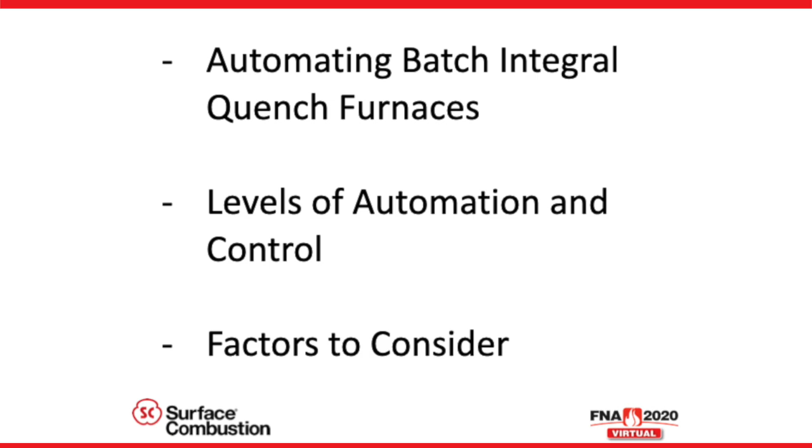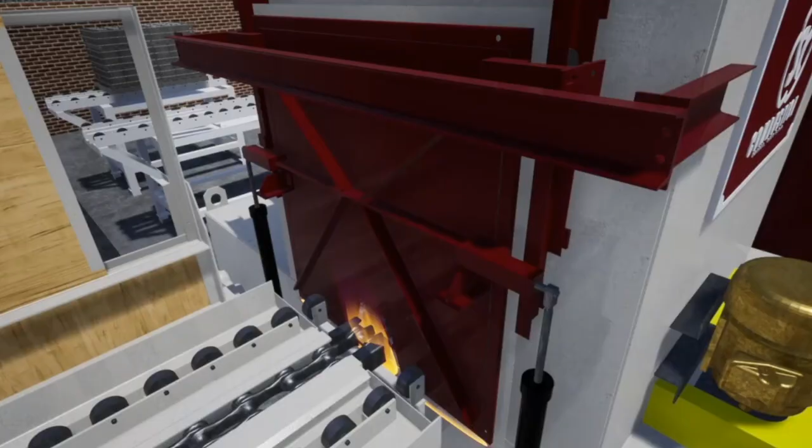The first step in describing an automated line is defining the movements and process of automation. We will first focus on the mechanical movements within the batch integral quench furnace. Although most furnaces manufactured today include internal handling systems, older furnaces and some still manufactured today use charge car handlers to transfer loads from the furnace chamber to the quench elevator.

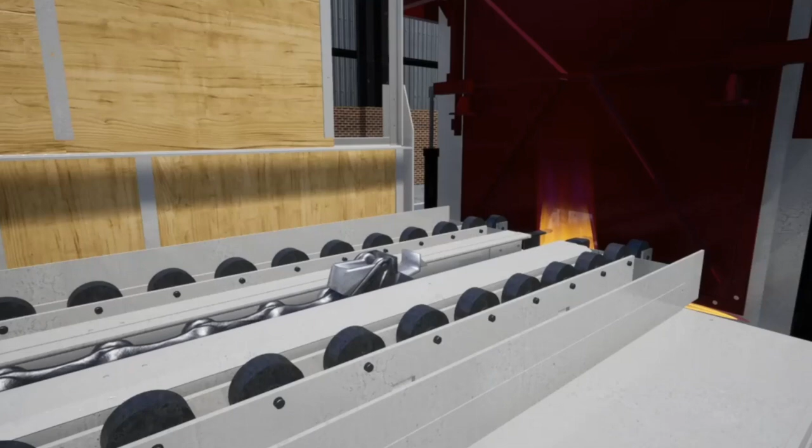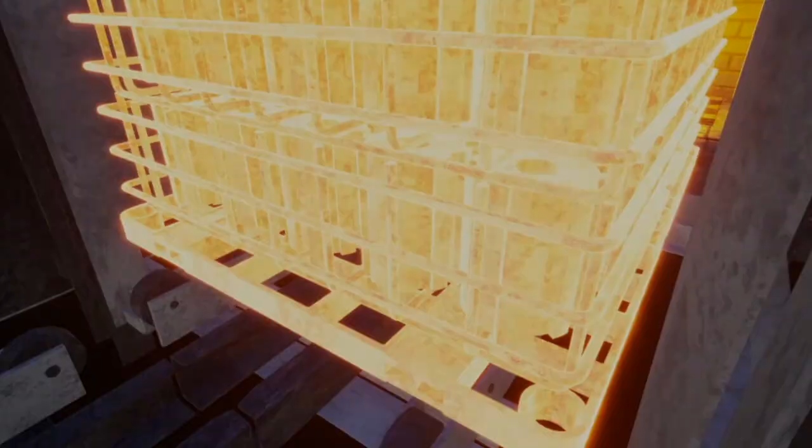All motions were controlled by operator push buttons. This included opening the vestibule and furnace door manually and charging the load with the charge car handling system manually. Load quenching was also performed manually with the charge car handler. This could result in varying furnace-to-quench times depending on the speed of the furnace operator pressing buttons and actuating handles. The result was a slow, non-repeatable quench time and inconsistent material properties.

The inclusion of the rear handling system allowed the internal motions to become part of the programmed cycle. This was a progressive step in the automation development. The furnace operator's only responsibility was to place the load into the vestibule and start the cycle.

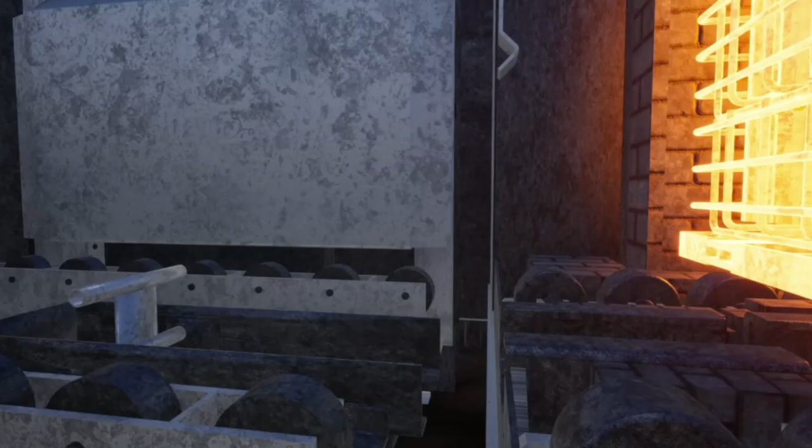Relays and timers would actuate the door and rear handler to transfer the load into the furnace, back into the vestibule, and down into the oil quench. The programmed movement provided for repeatable furnace-to-quench times, improving part quality and consistency.

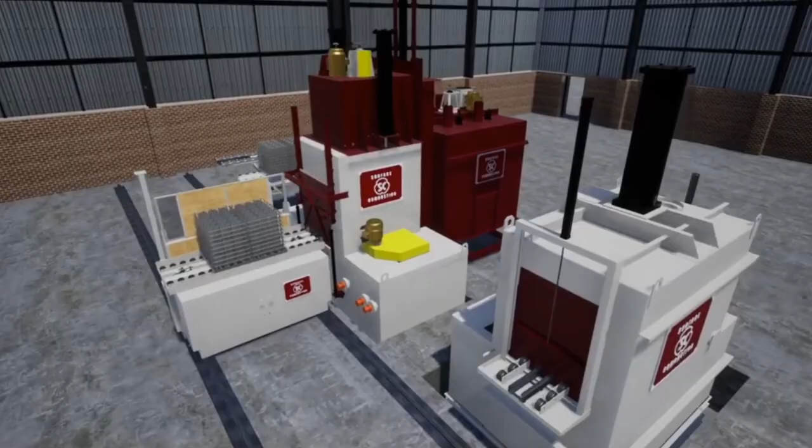Further advancement in controls replaced the timers and relays with PLC hardware and software. This presentation will focus on the next level of automation, which includes an unmanned charge car delivering loads between the heat treat equipment components, including BIQs, temper furnaces, washers, tables, and other components.

The programmed automation includes setting a path for the load to be processed from beginning to end. The plan would also include recipes for each step in the path. This may include pre-washing, preheat, carburizing or hardening, post-wash, and tempering. Once the path and plan are in place, the smart charge car will deliver the workload from step to step without the need of human interaction.

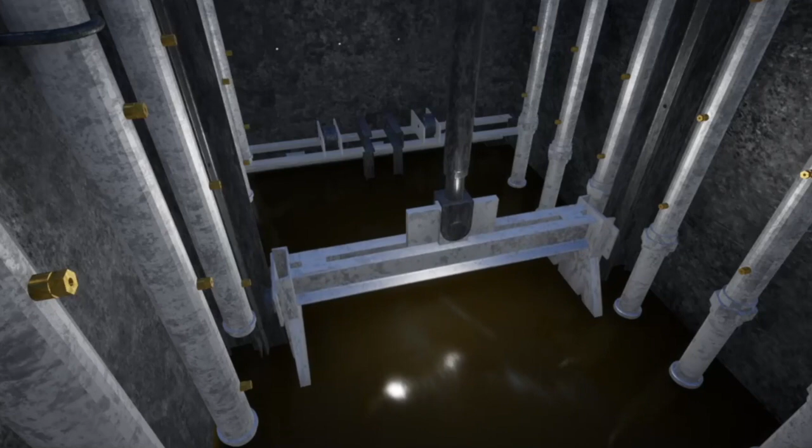Implementing an automation system will affect your business in many positive forms, including reducing the risk of accidents, improving quality control, increasing production, and optimization of manpower.

Discussing automation should also include some initial discussion of controls and the layers in the automation pyramid. A typical automation pyramid for industrial applications includes a field level, a control level, a supervisory level, a planning level, and a management level. On the field level, we find devices connected directly to the processing equipment.

The field level includes sensors, actuators, valves, and any other device used for controlling the equipment or collecting data from the process. Thinking back to the handling systems, the furnaces built 60 to 70 years ago operated on the field level only. There were no programs and no second level of automation.

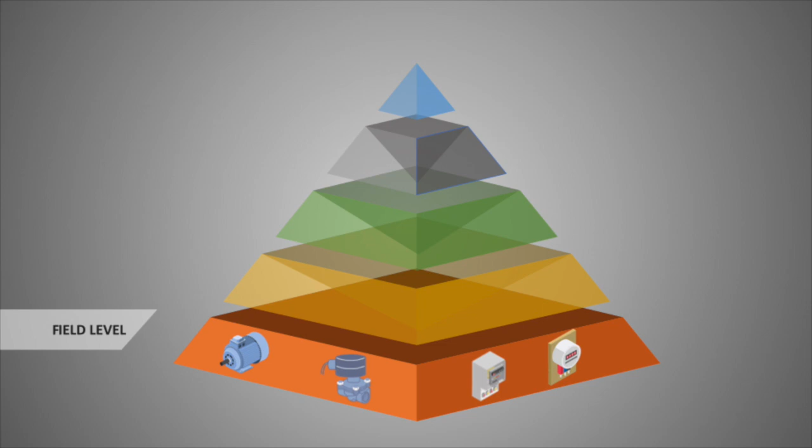The next level is the control level. This would include PLC hardware and the software program. The interaction from the field level and the control level allows for mechanical motions to occur along with the process control of the temperature and atmosphere to create complete thermal recipes.

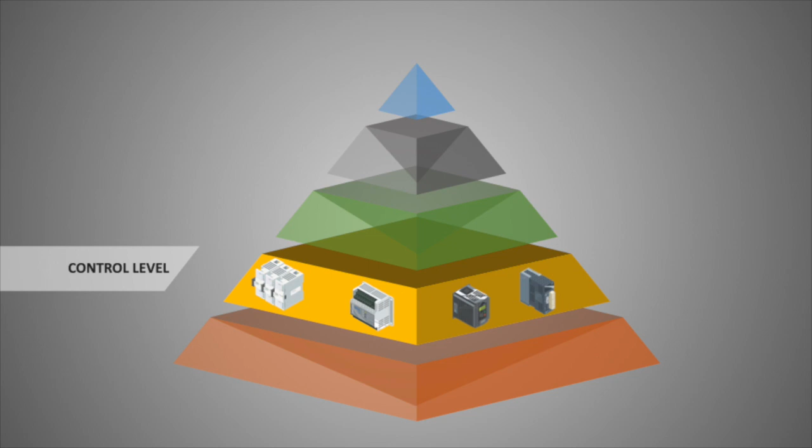The marriage of levels 1 and 2 is an improvement similar to the addition of a rear handler on a BIQ. It makes processing repeatable from one load to the next.

The third level up is the supervisory level. This includes the supervisory control and data acquisition, also known as SCADA systems. Anyone in the heat treating industry knows SCADA systems are a must, as industry standards such as CQI-9 and AMS 2750 require strict record keeping of process-related data.

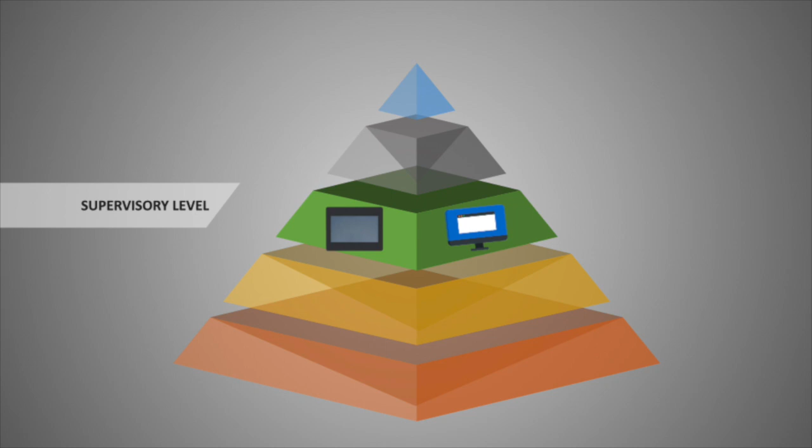A non-automated batch integral quench furnace line would include the bottom three levels of the automation pyramid. Adding automation to a batch integral quench furnace line includes the fourth level in the pyramid and ties the bottom three levels of the pyramid together.

As we mentioned previously, the automation includes a plan for the entire thermal treatment from preheat all the way through the temper treatment. Once programmed, the plan is executed while capturing the data and process parameters throughout each step. This includes data collection from instruments at the field level, tying them to a load recipe run in the control level, and transferring the information to the SCADA system.

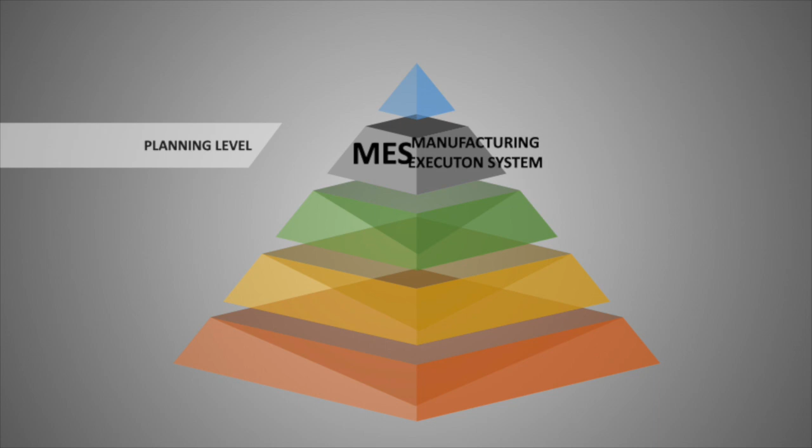This allows a heat treat facility to plan and provide a reliable, repeatable process flow of work while capturing all records along the way. The top level of the automation pyramid is the management level ERP system.

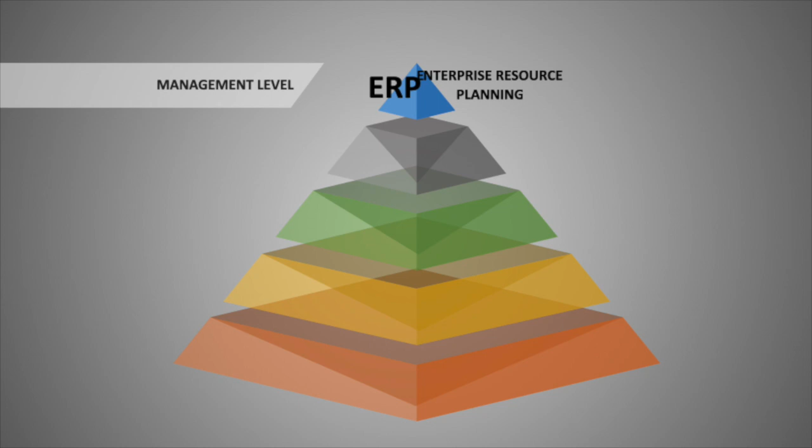Although this is not part of the conversation today, the next step and long-term goal would be to tie the automation system into a plant level ERP system. Now that we have reviewed the handling systems and the automation pyramid, we will focus on the advantages and improvements automation will bring to your facility.

Number one on the list is safety, as safety should always be in the forefront of any manufacturing facility manager's mind. The National Safety Council estimates work injury cost and time lost equal to $170 billion in 2018. Accidents requiring medical consultation cost an average of $41,000 per person, while the cost for a life was found to be approximately $1.1 million. There were 70 million man-days lost in 2018 due to injuries. Removing humans from areas of risk reduces the chance of injury.

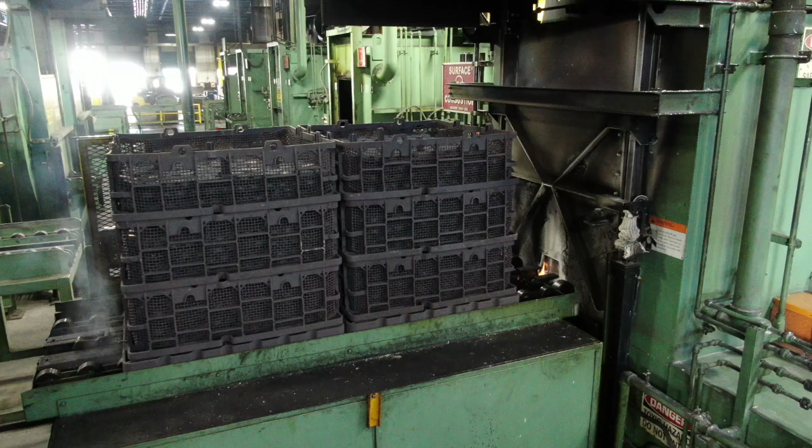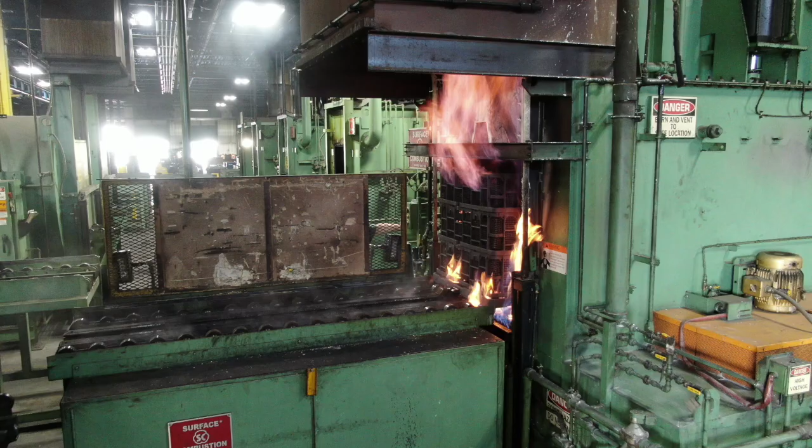In a heat treating environment, eliminating the need for workers in the furnace area and eliminating the need for an operator to load and unload the furnace greatly reduces the chance of an injury or accident. Pressure fluctuations, load transfers, and even the basic loading and unloading of a BIQ furnace require awareness and education to avoid missteps and accidents. The cost of one serious accident involving a worker is greater than the cost to include automation in the next batch integral quench furnace line.

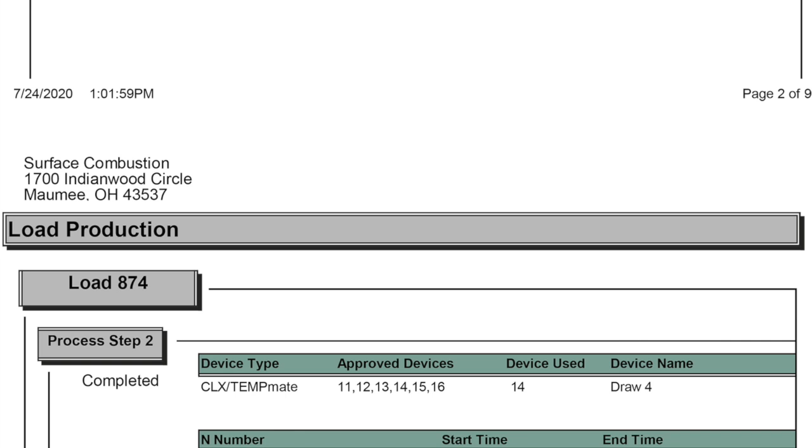The second major improvement that can be achieved by including automation is quality control. An automation system will allow the heat treat process plant to control the workload from entry to exit. The following is a report generated from an automation system installed in 2014 and still running today. Working with a SCADA system, a complete load production report lists the part number, description, and other information as the workload tracks through the heat treatment.

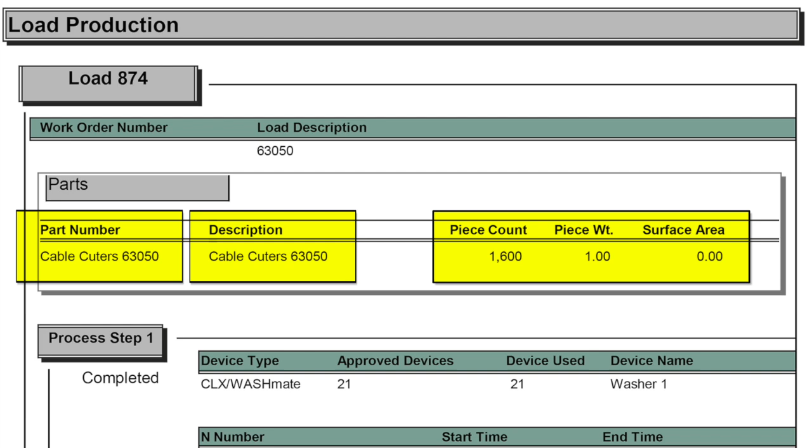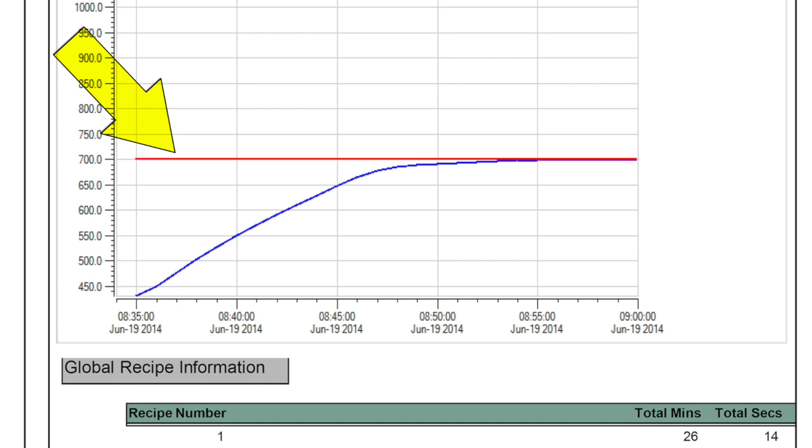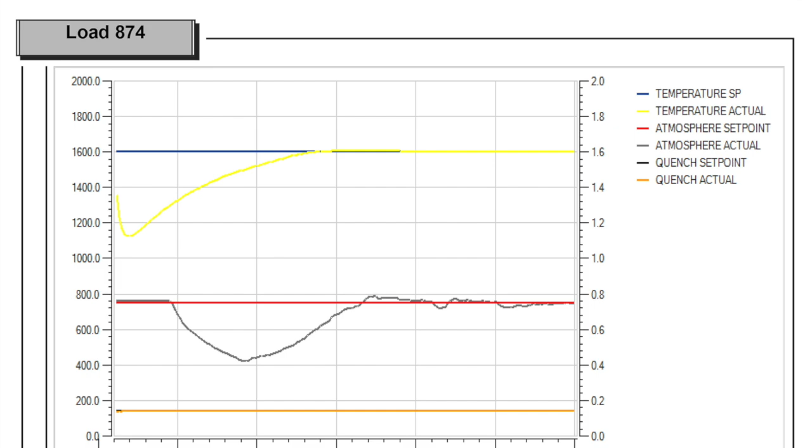In this case, a workload was washed in washer 1 and then sent to draw 4 to be heat treated to 700 degrees. All timestamps, temperature statistics, and alarms are recorded for future retrieval. The load then transferred to Allcase BIQ Furnace 3 for further heat treatment, again recording all process data, including temperature and atmosphere graphs. The load continued on through a post-wash, inspection, temper, and rust-preventive dunk tank.

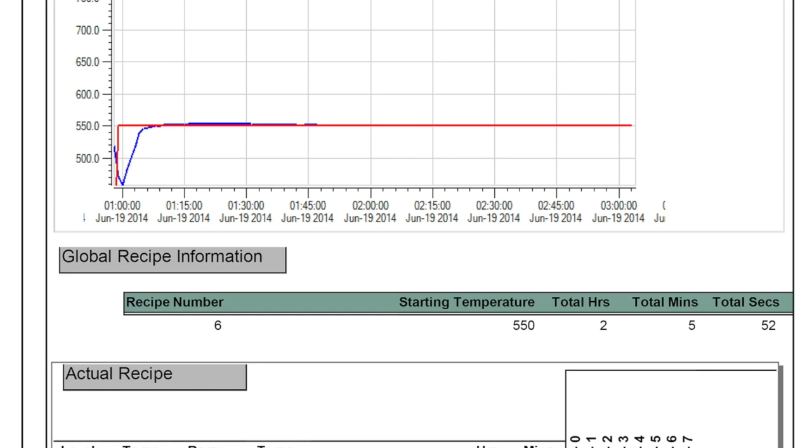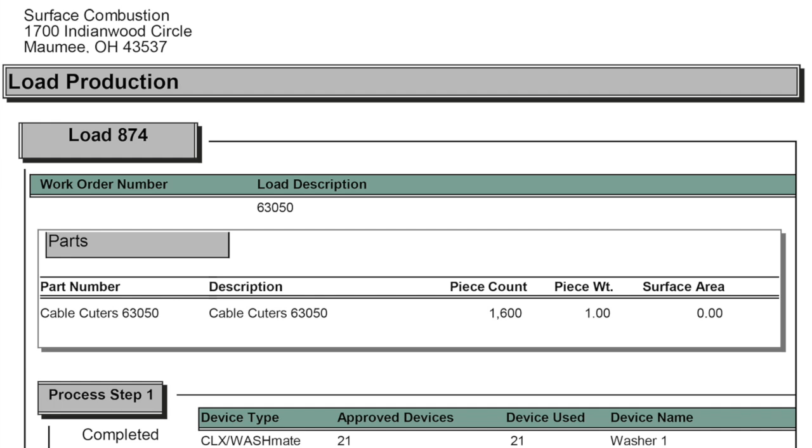At the conclusion of the heat treatment, a report can be generated with all of the critical data captured in one place. Metallurgical data, process, and load sizes can also be input into the report. No steps will be missed, and no recipes will be misentered in the individual controllers.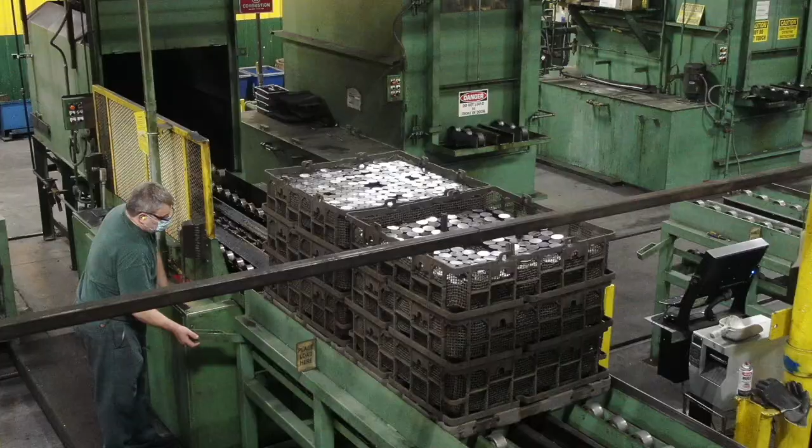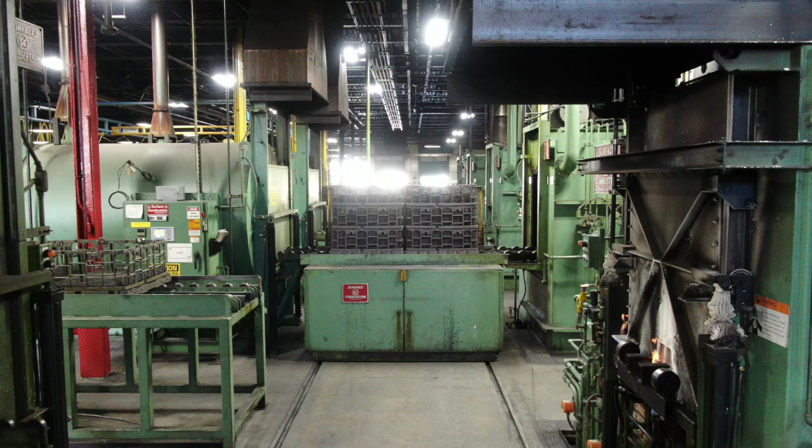Another advantage of automating a furnace line is increased production. Much of the drive to automate furnace lines was done by captive heat treating shops, processing the same loads over and over again. Automating the process allowed for optimum production while reducing the manpower required. The production advantages can be realized at commercial heat treat facilities as well.

With an automated charge car, idle loads are eliminated as the loads are transferred as soon as the next piece of equipment is available. No more waiting during shift changes, bathroom breaks, lunchtime, or smoke breaks. Workloads can be built up and staged for multiple furnaces and process steps. A first shift workforce can provide enough stacked loads to run through skeleton crews in the second and third shifts.

The 10-minute smoke break, plus the 15-minute shift change, plus the 5-minute bathroom break can add up over the course of a day or week. The additional time gained can result in an additional load making it into the furnace, providing extra income in the long run. One extra load per week over a 50-week work year is enough to pay for the automation.

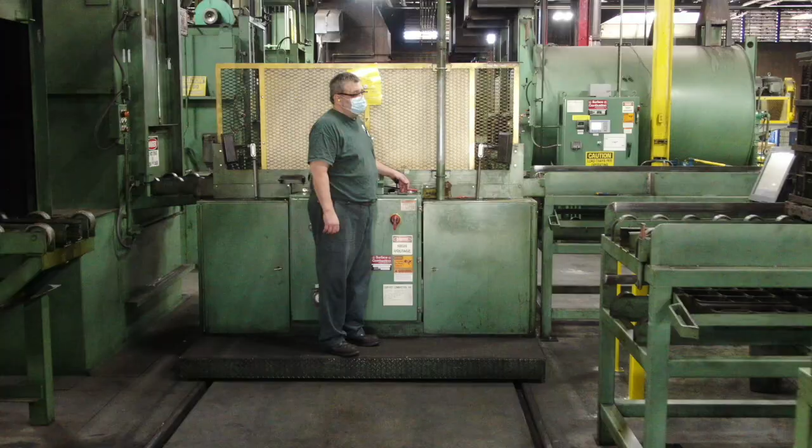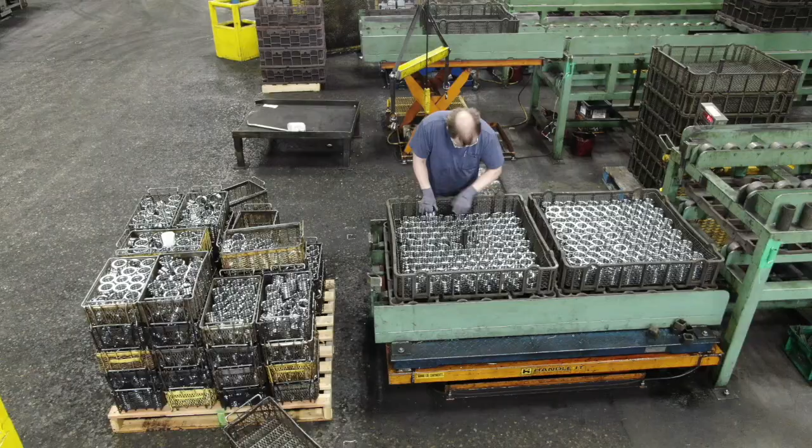Another advantage achieved by automating a batch integral quench furnace line is the optimization of manpower. Time once used in moving workloads from one piece of equipment to another can now be used to build more workloads, perform routine maintenance, part testing, or other required tasks. The skill set of a load builder may not be the same skill set as a furnace operator or the supervisor of the area. Automation provides a tool to optimize the talents of the workforce and time available for the task required to run production.

Whether you are looking into automating your BIQ line or not, the advantages achieved by doing so should be considered. Making your facility a safer environment to work in will prove to be more profitable in the long term by avoiding costly accidents. Allowing the programmed automation system to control the path and recipes of the entire thermal process while capturing all data required by your customers should be the ultimate goal of quality control. Utilizing your equipment to its fullest extent with the greatest production utilization means maximizing the profit available from your equipment.

These subjects, along with the optimization of manpower, can be achieved more easily with the implementation of automation on your batch integral quench furnace line.